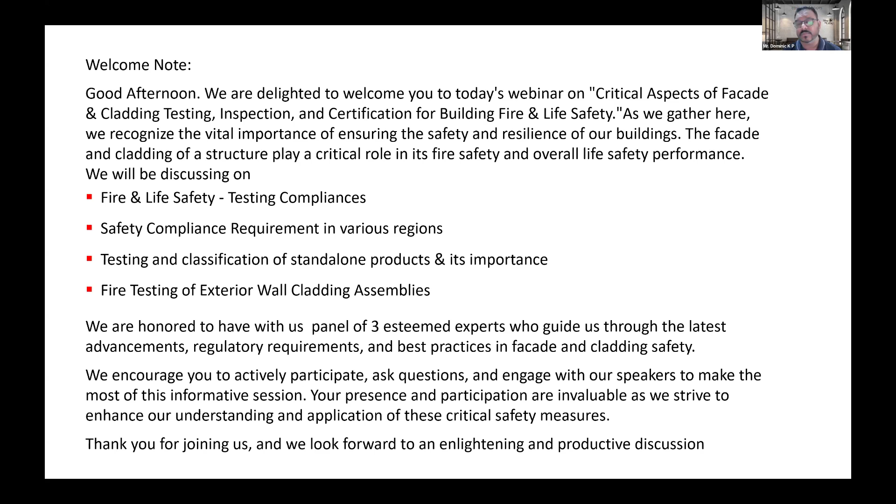I would like to introduce today's speakers. We have Julius here from Dubai, based out of Dubai, and he'll be talking to us from there. He's a senior certification specialist with over 4 years experience in conformity assessment body and 15 years experience in building engineering and construction. He worked as an electrical engineer and senior MEP engineer with different organizations, delivering wide varieties of small and large-scale building projects, involved in building MEP system design, implementation, and supervision. Before joining Emirates Safety Lab as a specialist in conformity certification of fire and life safety, he worked in Dubai Civil Defense as a DCD approved engineer or inspector in a third-party fire consultant house of expertise, where he enhanced his knowledge and expertise in building, fire, and life safety.

This is Julius for you gentlemen, and we have another speaker, Rachel. Rachel also worked in the testing, inspection, certification industry for over 8 years, and she has technical expertise and in-depth knowledge in various reaction to fire standards, including Steiner tunnel test methods, European standard EN 13501 for classification of construction products, roof, fabric, upholstery testing, and cone calorimeter. That's Rachel for you.

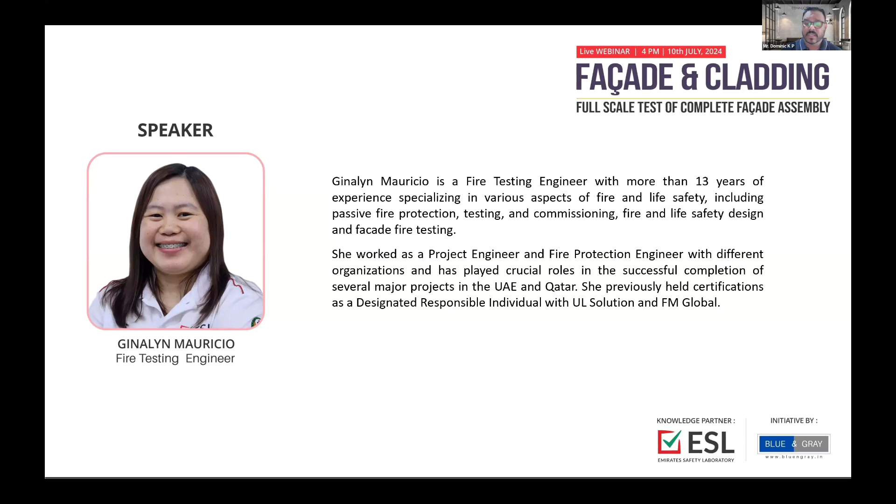And the third speaker, we have Gina. Gina is a fire testing engineer with more than 13 years of experience, specialized in various aspects of fire and life safety, including passive fire protection, testing, commissioning, and fire and life safety design and facade fire testing. She's been with Emirates Safety Lab for some years, and these three wonderful experts will be sharing with us today. I now welcome Mrinal, who's a regional manager also responsible in India, to give opening remarks, and later Julius will take on the presentation. Over to you, Mrinal. Thank you, Dominic.

Welcome everybody, it's my pleasure to welcome all of you for joining this insightful webinar on external facades and cladding. As the construction industry is evolving with the latest standards, innovations, and best practices in building facade systems, through this webinar it's our humble attempt to share insights on the latest testing methodologies and certifications crucial for ensuring the durability and safety of using such systems on construction projects.

I will just brief about what ESL is and who we are. ESL is an internationally accredited third-party testing laboratory and certification body based out of Dubai. We specialize in the fire safety of construction products and building materials. ESL is part of Dubai Civil Defense, and we are capable to test for more than 110 standards and to certify for more than 600 standards.

For our guests who are based in different countries and are looking to market their products here in Middle East or in UAE, we are here for the long term to facilitate market access to local, regional, and global entities by providing conformity assessment activities and ensuring safety and compliance with the local rules and regulations.

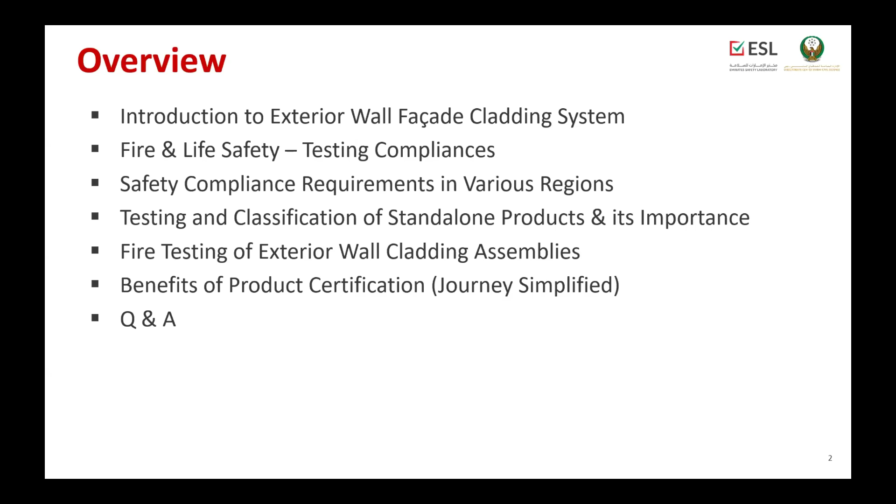So what is an exterior wall facade cladding system? When we talk about facade cladding, it refers to the external appearance of a building. In other words, it is the superficial or outermost part which envelopes the superstructure of the building. Most building exterior designs differ from each other. The aesthetic aspect is one of the main reasons why facade cladding is introduced in a building. The cladding system is a non-load bearing element, part of a building exterior, meaning it has no structural function and is not structurally integral to the building.

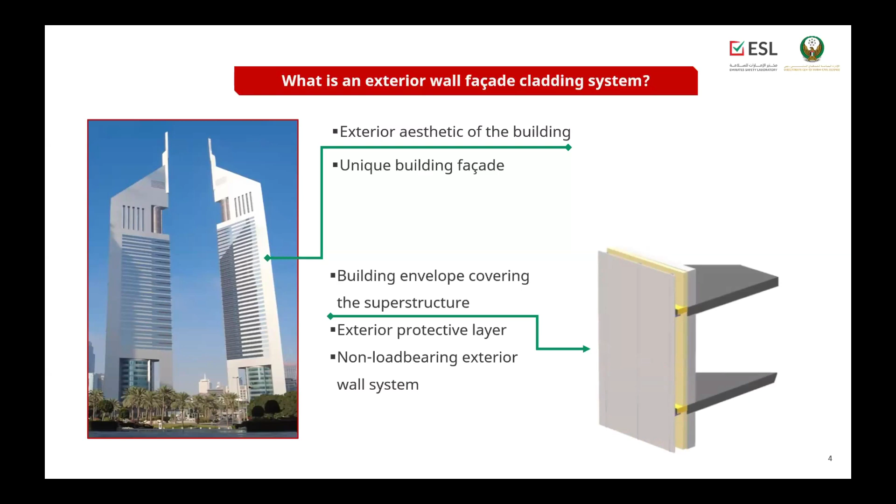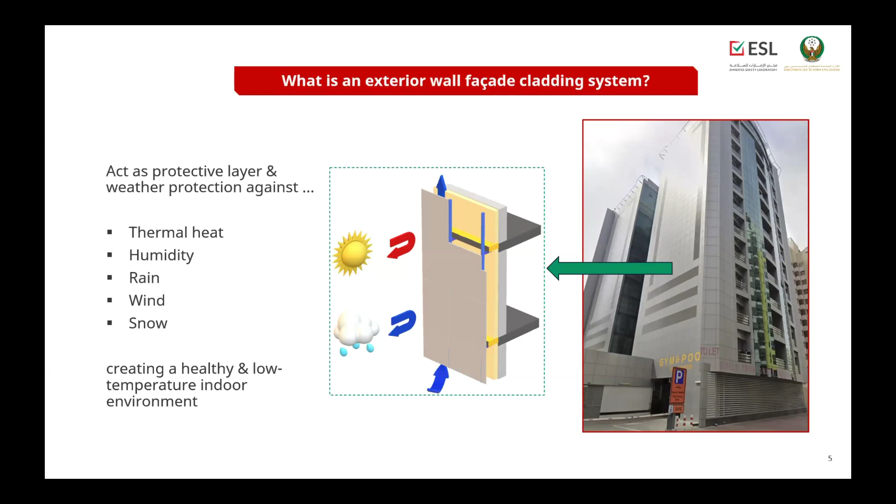They are normally supported to the main structure using framing systems mounted on the floor edges and the exterior wall substrate. Besides its main aesthetic purposes, which comes in different colors, types, and styles, the facade cladding system is designed to serve as an external protective layer. It provides weather protection against the effects of thermal heat transfer by improving the thermal transmittance or U value of the building exterior. It also protects the building from the effects of rain, wind, and snow, which contribute to exterior wall degradation if not properly protected.

Facade cladding can be categorized into two types: ventilated cladding, commonly known as rain screen cladding, and non-ventilated cladding. Ventilated cladding advantages are that air can move freely inside the cavity, preventing condensation and accumulation of moisture and allowing water to be drained. However, open joints between the cladding panels present a risk of rapid vertical fire spread, especially when combustible materials are present in the cavity. It is also considered the worst case scenario from a fire test point of view.

An open state cavity fire barrier must be installed to mitigate rapid fire propagation in the cavity of a ventilated facade cladding. For non-ventilated cladding like EIFS, there is no air cavity or gap created between the insulation and the cladding or finishing system. Moisture may accumulate over time, leading to loosening, cracks, mold growth, and frequent moisture repairs.

Other non-ventilated cladding may have a void or cavity between the insulation and the cladding materials. These voids are divided into separate compartments by a closed-state cavity fire barrier system. The joints between cladding panels are closed and sealed using sealant and backing materials, and other methods like the dry seal system using an aluminum profile and snap-in silicone gasket. Therefore, it does not allow air to move in the cavity, and water from rain will not penetrate.

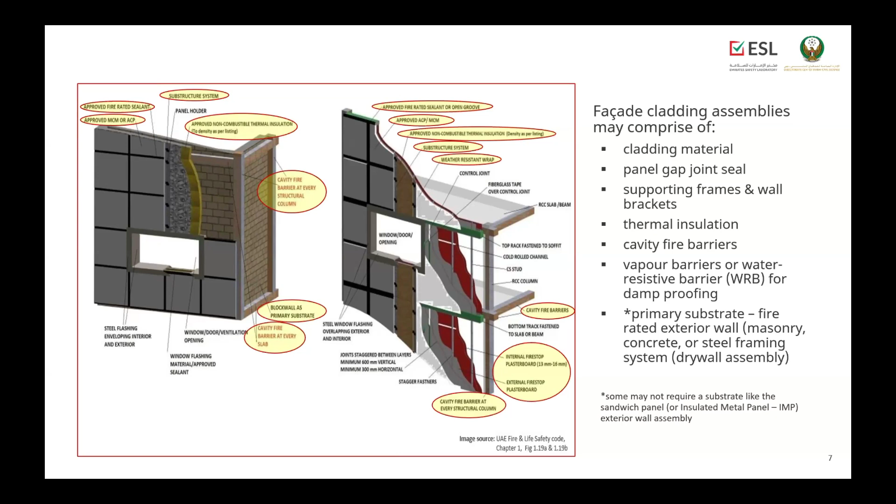Here are the various common types of cladding material used for aesthetic and external weather protection of the building. Let's start with aluminum composite panel, or aluminum composite material. It is made of two thin aluminum sheets bonded to a limited combustible or fire retardant rated core. It is commonly used due to its low weight, increased thermal insulation of the core material, durability, and corrosion resistant characteristic.

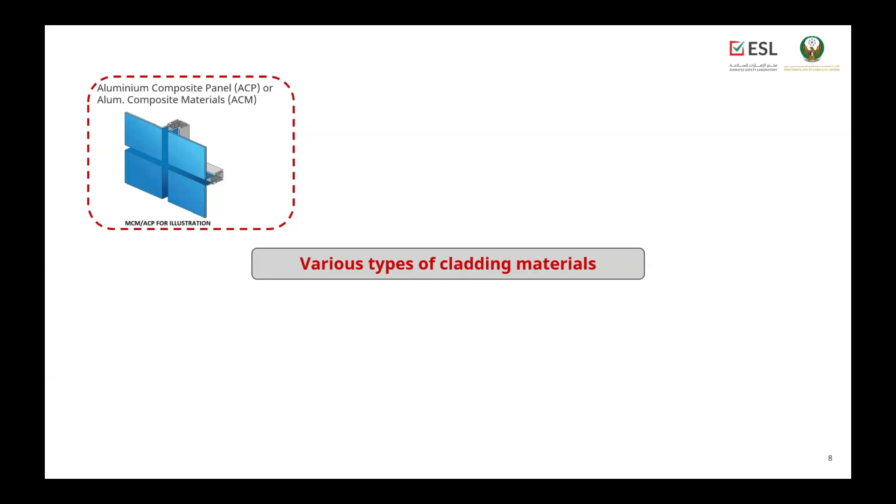Glass fiber reinforced concrete, or GRC, is a cladding material made of cement, sand, and glass fiber. Glass fiber reinforced plastic, or fiber reinforced plastic, or FRP, is a type of cladding material made of a combination of glass fiber and polymer resins.

EIFS, or exterior insulation and finishing system, or ETICS, is comprised of an on-site installed insulation board applied with a base coat, reinforcing mesh, and finishing coating material. Material like terracotta and ceramic porcelain can also be used as cladding material, made by firing clay at high temperature.

Then we have sandwich panel or insulated metal panels, made of two metal skins bonded to a PIR or stone wool core insulation material. Next is coated solid metals, made with corrosion resistant, low weight aluminum sheets or stainless sheets that are powder coated or painted with liquid coatings.

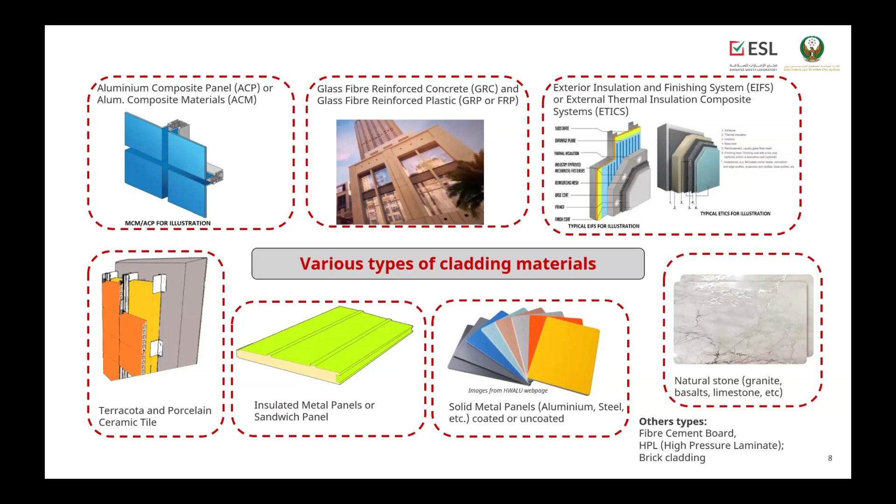Then also natural stones like granite or limestone, produced directly from the quarry, are also used as cladding materials. Other types like fiber cement boards, high pressure laminate or HPL, and conventional brick cladding can also be used as cladding material.

So why is fire safety in cladding very important in buildings, especially high-rise buildings? When combustible cladding materials and other components are installed in the facade system, the risk of igniting a fire and fire propagation is more likely due to the amount of fire load present in a facade cladding assembly. Similarly, due to the poor fire performance of exterior wall assembly in many buildings, cases of rapid exterior fire spread are being attributed to facade cladding systems.

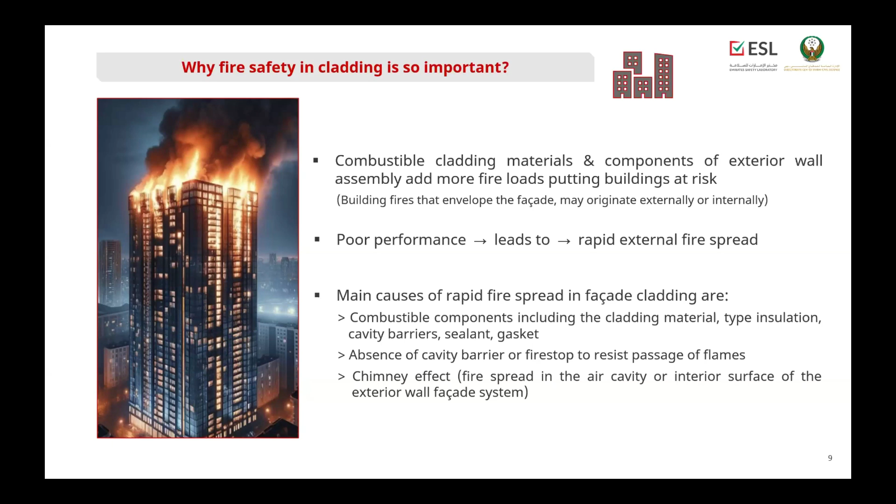The main causes of rapid fire spread in facade cladding are due to combustible components, starting from the cladding material itself, then the absence of effective cavity fire barrier that causes the chimney effect and lateral flame spread in the cavity.

To address the challenges of facade cladding fire safety, the facade cladding in existing and new buildings must be safe and durable. Ensure that tested and certified materials and systems are used. And lastly, of course, you have to set the highest fire safety requirements and ensure that everyone adheres to the regulation.

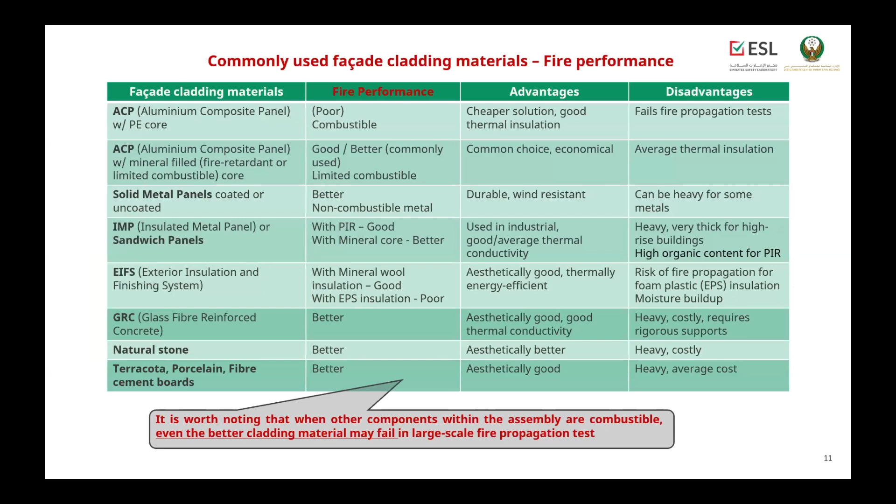So let's move on to the fire safety testing requirements, which vary in different regions or economies. Testing for facade cladding can be divided into two. First is the testing of material as a standalone product, and second is the testing of the facade system as an assembly. The purpose of testing for the product is determination of material combustibility and materials' contribution to the growth of fire.

It applies to mostly all the components of the cladding, including thermal insulation, vapor barriers, cavity barriers, and joint or sealant components. For the testing of assembly and system, the main purpose is to evaluate the fire propagation characteristic of exterior wall assemblies and also determine the fire performance characteristic of the external cladding system.

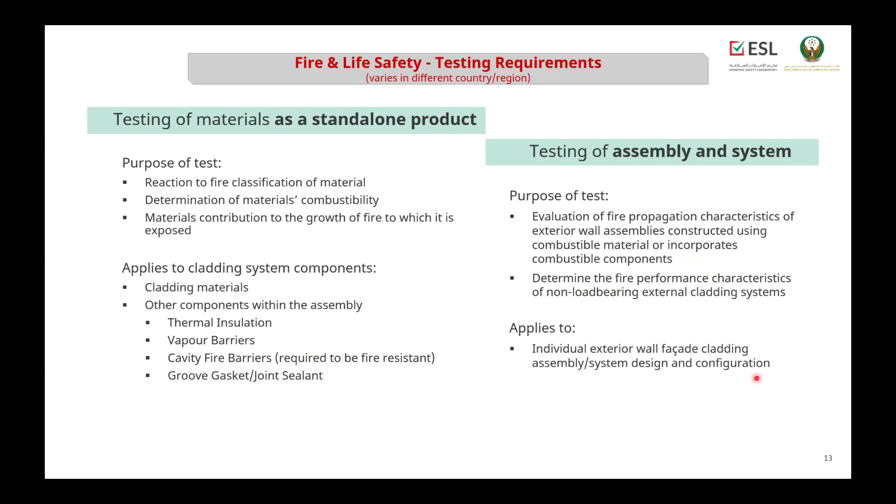So here are some of the testing methods that are practiced in different regions. On the left side we have the reaction to fire testing, or standalone product testing, that is applicable for different components of the cladding. But we have to note that these methods do not determine the fire resistance or the product's ability to resist the passage of flame and hot gases.

So we have different standards from European, from American, and also BS from the UK or British standards, as well as IS standards, Indian standards, that are applicable for testing standalone products. Also on the right side is the testing of assembly and systems that are recognized in different countries, like the NFPA 285 and BS 8414 testing.

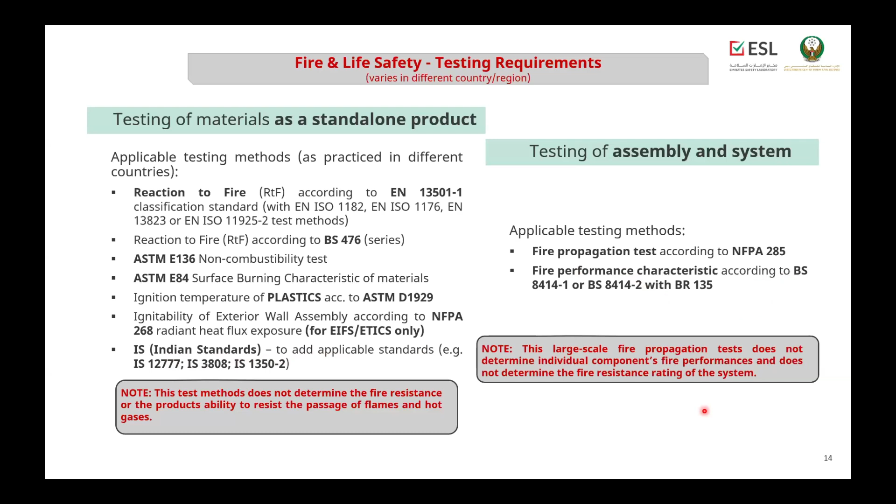And again, a note is that this large-scale fire propagation test does not determine the individual components' fire performance and does not determine the fire resistance rating of the system.

I will start by giving you detailed information about the requirements for different countries or regions, starting from the UAE. The UAE Fire and Life Safety Code of Practice, in Chapter 1 and Section 4, provides the compliance requirements for facade and exterior wall covering systems, applicable for different types of cladding like ACP, EIFS, sandwich panels, GRP, and other types of cladding detailed in separate sections.

So in general, for super high-rise buildings, high-rise buildings, malls, schools, and hospitals, the cladding materials are required to meet Class A1 or Class A2 S1D0 in accordance with EN 13501. For mid-rise and low-rise buildings, including warehouse and industrial buildings, the classification required should be classified to B-s1,d0 in accordance with EN 13501.

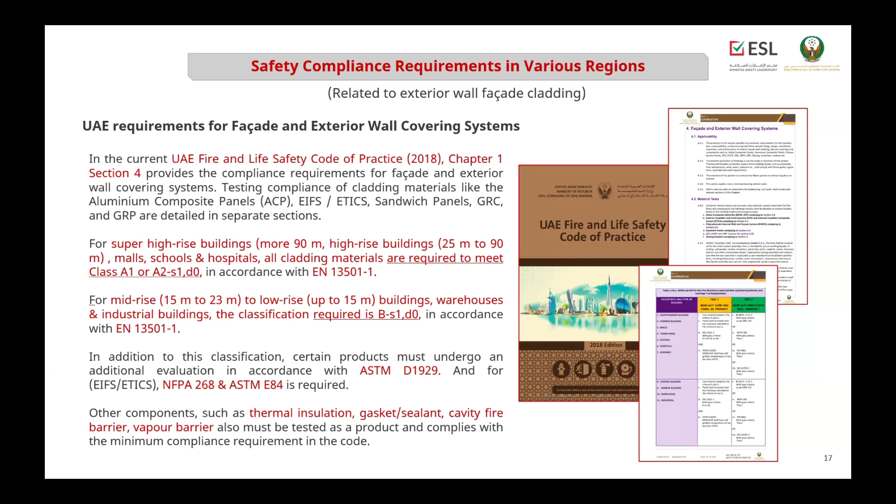So also in Chapter 1, Section 4, the requirement for testing of all the facade cladding must be done or must be tested as an assembly and obtain a pass classification in accordance with NFPA 285 or BS 8414 Part 1 or Part 2, under the classification of BR 135.

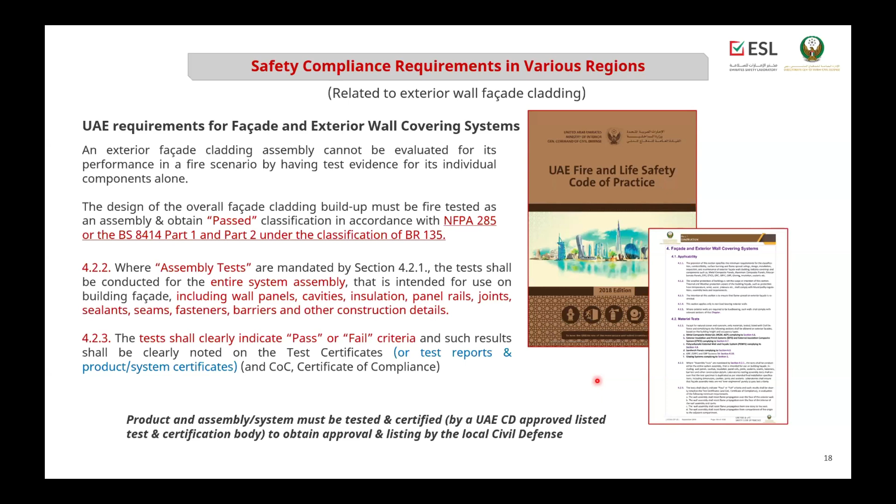So also the requirement for the UAE is that all the products and assembly systems must be tested and certified. And also there will be a requirement that there should be testing and certification by a UAE Civil Defense approved, listed testing and certification body, to obtain an approval and listing by the local civil defense.

Next is for the Kingdom of Saudi Arabia, which follows the code requirements as per SBC 201. In Chapter 14 of SBC 201, it requires that for buildings of type 1, type 2, type 3, or type 4 construction greater than 12 meters in height, it should be tested with acceptance criteria of NFPA 285. And for combustible exterior wall coverings installed in exterior walls having a fire separation of 1.5 or less, they shall not exhibit sustained flaming as defined in NFPA 285.

They also have separate requirements for specific cladding material like MCM or ACP. For type 1 to type 4 construction, the ACP shall have a flame spread of not more than 25 and smoke development of 450 or less when tested to ASTM E84 or UL 723. Also, the thermal barrier or insulation materials should pass testing to NFPA 285 and NFPA 275.

They also require a full-scale testing for the whole assembly using MCM system or MCM cladding material, based on NFPA 285 testing. However, there's also an exception for MCM installation above 12 meters, 15 meters, and 23 meters that doesn't require ASTM E84 and NFPA 285 testing, but they have to satisfy the requirements for fire separation distances and specific results from ASTM D1929 and/or ASTM D635.

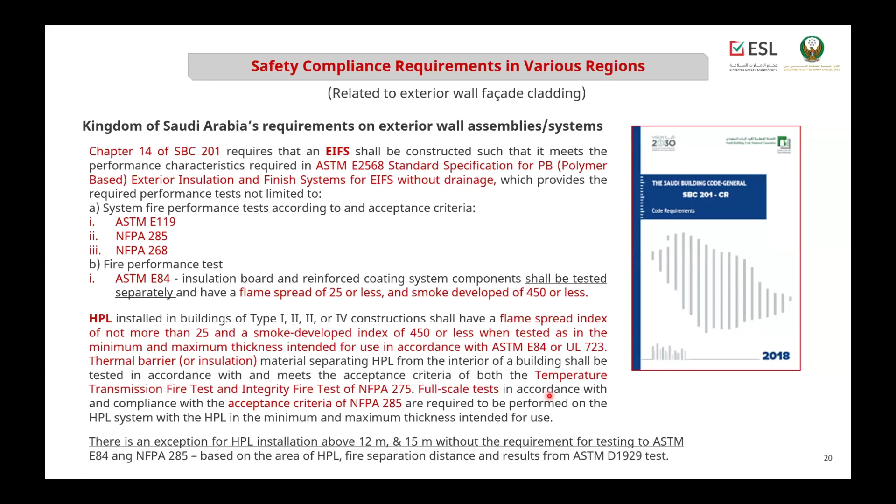So in Saudi Arabia also there is a specific requirement for aluminum composite panel for external cladding and internal finish based on SASO 2752. In SASO 2752, the ACP are actually classified in 3 different classifications: the FR1 ACP, which is equivalent to A1, then FR2 ACP equivalent to A2S1D0, and FR3 ACP, which is equivalent to Class B S1D0 based on EN 13501-1.

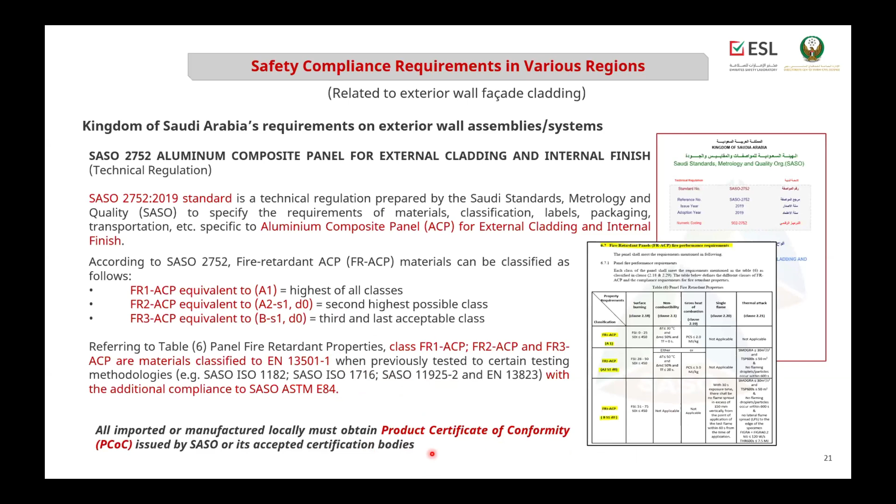So the only addition here, or as required by SASO 2752, is that ACP should be tested not only to EN 13501-1, but also tested to ASTM E84 to obtain the classification. And basically, all imported or manufactured locally products must obtain a product certificate of conformity issued by SASO or its accepted certification body.

So we go to the requirement for England regarding facade systems on high-rise buildings. So the reference is the Approved Document B, the latest version being the 2022 version, or the amendment 2022.

So they require that combustibility of external walls should meet the following provision for the external surfaces, materials and products, cavity fire barriers, and also it has to meet the fire performance criteria given in BRE for external walls using full-scale test data from the BS 8414-1 or BS 8414-2.

And also in England, since June 2022, the amendment to the Approved Document B requires that for relevant buildings, or those buildings that contain one or more dwellings, an institution, or a room for residential purposes with height more than 18 meters above ground level, and residential purposes group 1 and 2 with height more than 11 meters, that are also part of the external wall, shall have a classification of A2 S1D0 or Class A1.

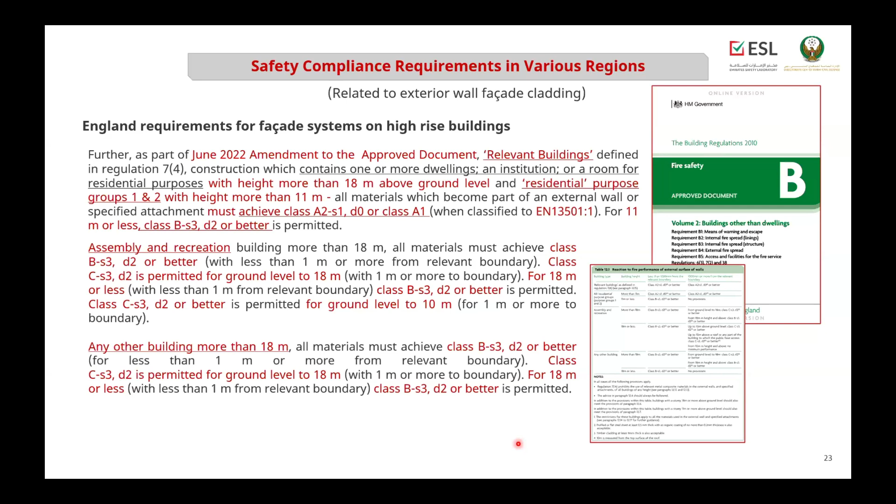There are also certain specific requirements in Approved Document B for cavity and cavity barriers, and it is written in section 9 that it requires the cavity barriers to have a minimum of at least 30 minutes integrity, or E30, and 15 minutes insulation, or I15, and the surface which faces the cavity should follow the provision of table 12.1 for all materials of external construction to be complied with.

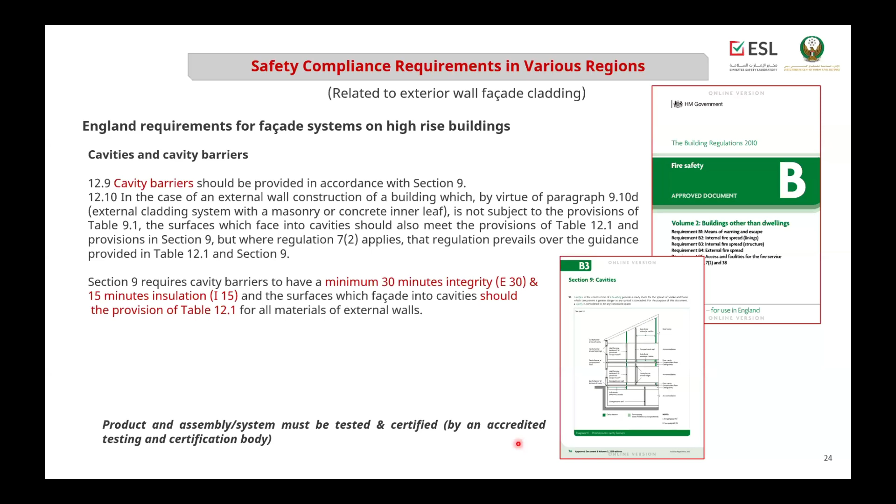So also the requirement in England and the UK normally requires that product and assembly testing must be tested and certified by an accredited testing and certification body. So moving on to the Singapore code requirements for external wall assemblies or wall finishes.

They require that for homogeneous cladding on external walls, it shall be constructed of material of at least limited combustibility tested in accordance with BS 476 Part 11 or approved equivalent. And they also allow Class 0 flame spread rating tested in accordance with BS 476 Part 7, and Class B rating classified under EN 13501-1.

So there's also a separate requirement for composite panels used as cladding on the external wall, and it requires that the composite panel used for external cladding shall be mounted against a 1 hour fire rated wall and shall comply with any of the following.

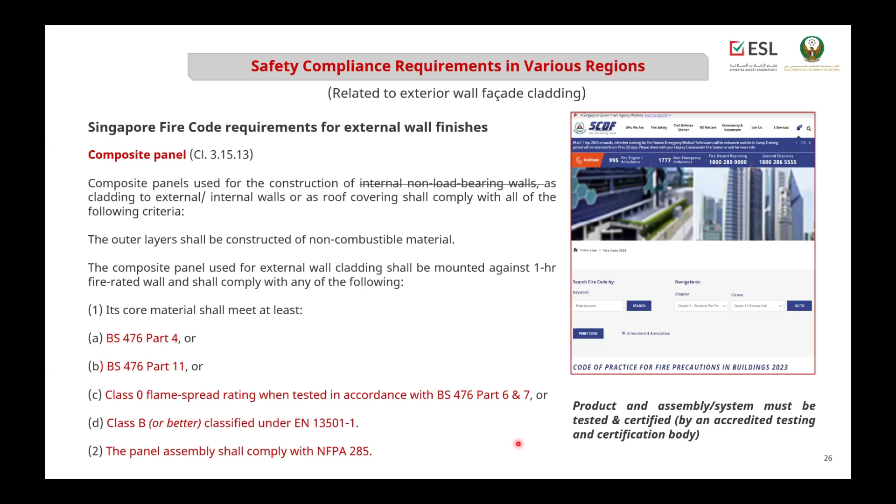So the core material of a composite panel should have obtained or passed the test for BS 476 Part 4, then BS 476 Part 11, and also obtain a Class 0 flame spread rating when tested to BS 476 Part 6 and 7, or have a Class B or better classification under EN 13501-1. Singapore also requires that the panel assembly or exterior wall facade cladding assembly shall comply with NFPA 285 testing requirements.

Next, moving on is the requirement from IBC 2021, which is basically applicable for the majority of states in the USA. The main requirement for exterior walls is written or provided in Chapter 14, Exterior Walls.

There are requirements for water-resistive barriers that are installed or provided in Type 1, Type 2, Type 3, Type 4 construction that are greater than 40 feet or 12 meters and contain a combustible water-resistive barrier - they should comply with the acceptance criteria of NFPA 285.

And for combustible material on the exterior side of the exterior wall, they require that combustible exterior wall covering shall not exceed 10% of an exterior wall surface area where the fire separation distance is 5 feet. Also, the combustible exterior wall covering shall be limited to 40 feet or 12 meters in height above grade plane. They also require that wood veneer shall comply with the specific requirement in section 1404.5.

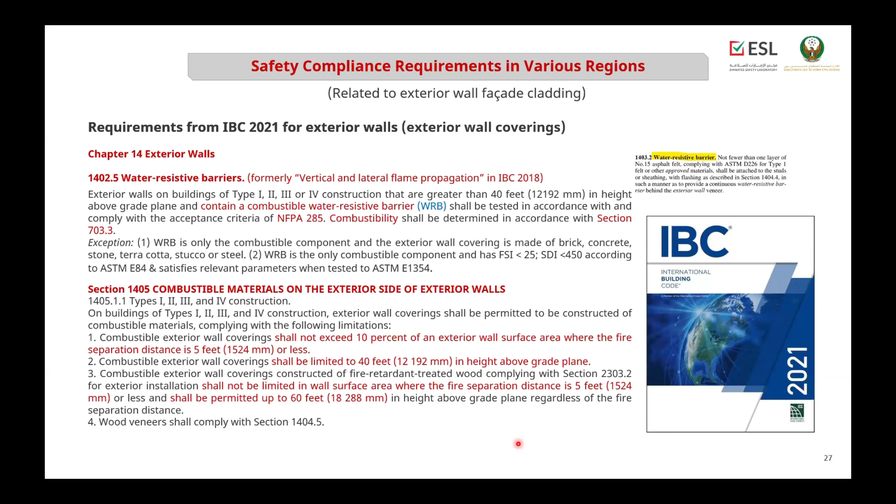So non-combustible materials in IBC are determined by testing to ASTM E136 and also ASTM E2652. There's also an exception for materials to not be tested to ASTM E136 if the materials have a structural base of non-combustible material determined with ASTM E136 - these are, for example, materials applied to a non-combustible material like fiber cement board.

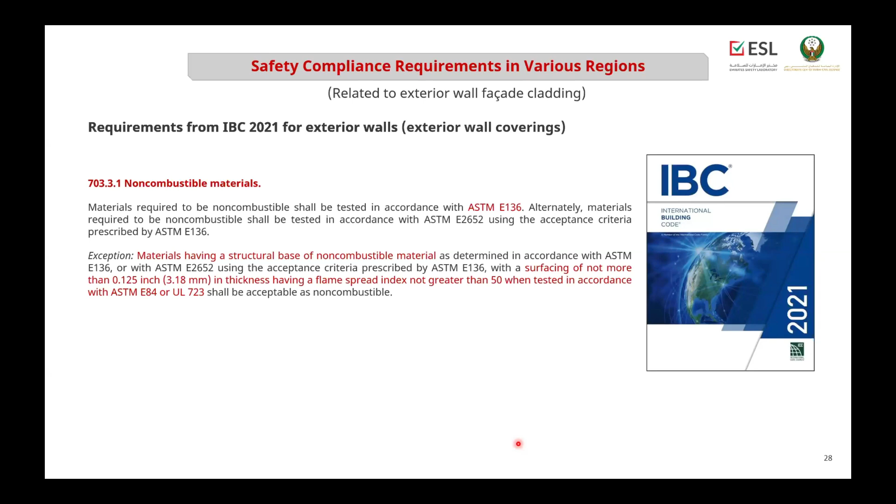It will be exempted from testing to ASTM E84, ASTM E136, and will be classified as non-combustible when the surface of not more than 0.125 inch thickness has a flame spread not greater than 50 when tested in accordance with ASTM E84.

There's a specific requirement for metal composite materials, or ACP. They require that there should be a fire resistance rating when tested, when the MCM system is used in the exterior wall, required to have a fire resistance rating in accordance with section 705. There's also an exemption to not test for fire resistance when the MCM system that is part of an exterior wall assembly or envelope does not contain foam plastic insulation.

For metal composite panels, there's a minimum requirement that they should be tested to ASTM E84 and obtain a flame spread index of not more than 25 and smoke developed index of not more than 450. And of course, they require also a separate test of the MCM system to a full-scale test based on NFPA 285 testing.

And for EIFS, the separate requirement from IBC is that the performance characteristic should follow or pass ASTM E2568, which requires the test mentioned in the table - it should be tested to ASTM E119, to NFPA 285, and also to NFPA 268. The fire performance test of EIFS per component should be tested to ASTM E84.

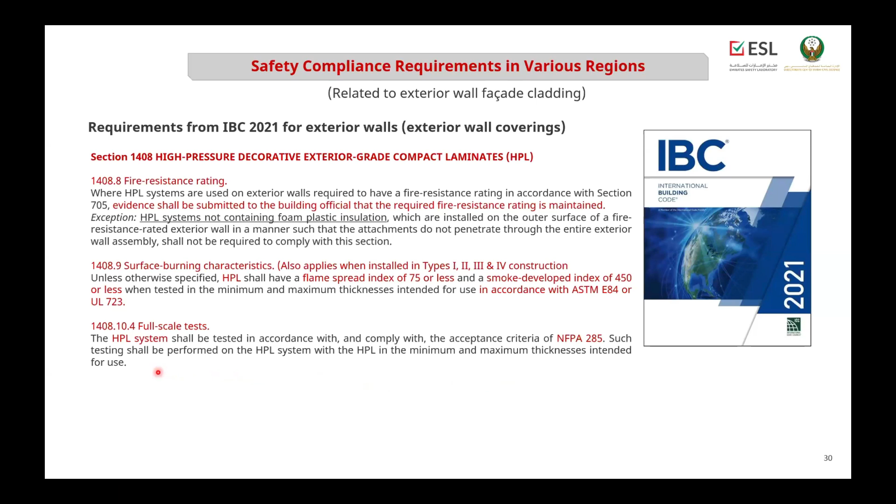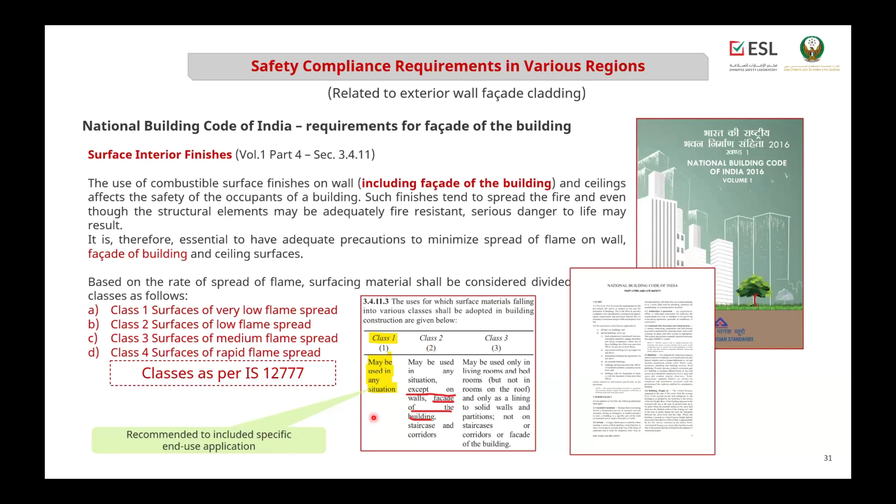I have done some checking on specific standards mentioned in this specification of ACP, where I found that some of these standards have the same concept as other international standards. For example, IS 1350-2 has the same concept as EN ISO 1716 for bomb calorimeter, and IS 3808 is identical to BS 476-4 or EN ISO 1182 for non-combustibility test, and IS 12777 is identical to BS 476-6 or 7, which is for flame spread characteristic. There's also IS 15061 Annex B which has the same concept as EN ISO 11925-2, for ignition of the product or material test.

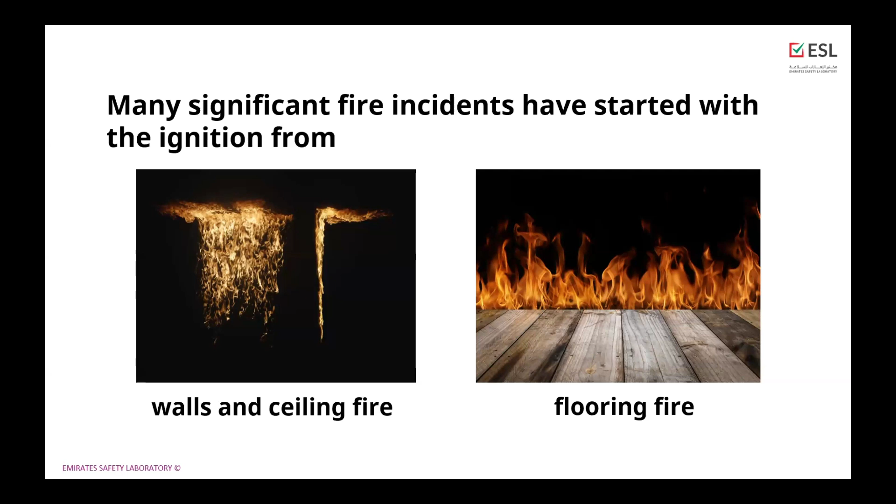For the past years, many significant fire incidents have started with the ignition of products from the walls, ceiling, and floor, as these products are often made of highly combustible synthetic materials. As a result, many lives were lost due to the limited time of evacuation and the dangers that come with flashovers. We always hear the word to prevent flashover.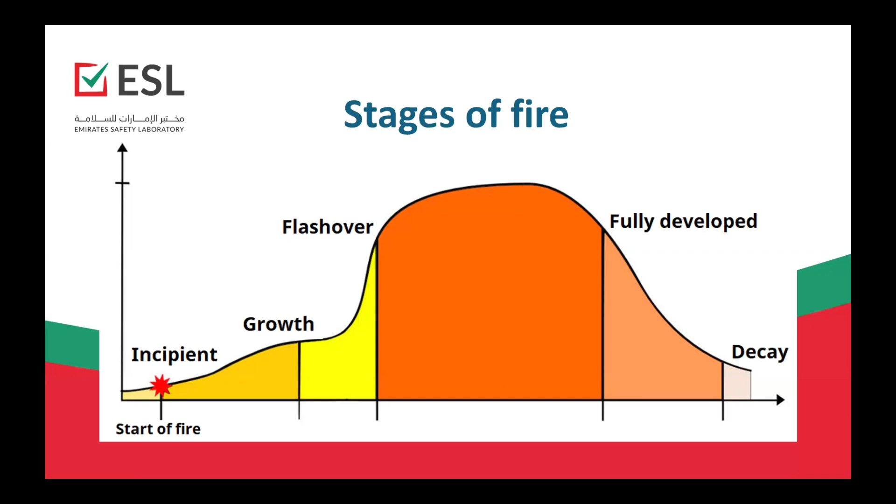What is a flashover then? Here we have the stages of fire. There are 5 stages in the development of fire. First is the incipient stage, where initial ignition happens. Ignition may come from an open flame or smoldering source. The second stage is growth, where the fire grows depending on fuel load, combustion type, and oxygen availability. Next is flashover, the transitional stage between growth and fully developed stage. Fourth is the fully developed stage, where the fire has reached its maximum potential. Last is decay, the final stage of fire, where fire begins to subside and no oxygen and fuel is introduced to the space.

Focusing on flashover, it is defined as a rapid fire progress. NFPA 921 defines it as a transitional phase in the development of a compartment fire in which surfaces exposed to thermal radiation reach their ignition temperature, and fire spreads rapidly throughout the space, resulting in full room involvement or total involvement of the compartment or enclosed area. In short terms, flashover is a transition from having a fire in that room to having that room on fire. The UAE Civil Defense, or any authority having jurisdiction of every country, regulates testing for products to verify that every combustible surface exposed to thermal radiation in a compartment or enclosed space does not rapidly and simultaneously ignite and result in a flashover.

According to studies by UL, the rate of flashover for modern homes is 8 times faster than it was 50 years ago. So UL determined that fires today are more dangerous and pose more risks than in the past. The findings about modern home fires highlight that the conditions we face today and will face in the future are very different than those faced by prior generations. So in these evolving times, what can be considered as a measurement technique to assess combustibility of materials? This is where the EN 13501 test methods come in.

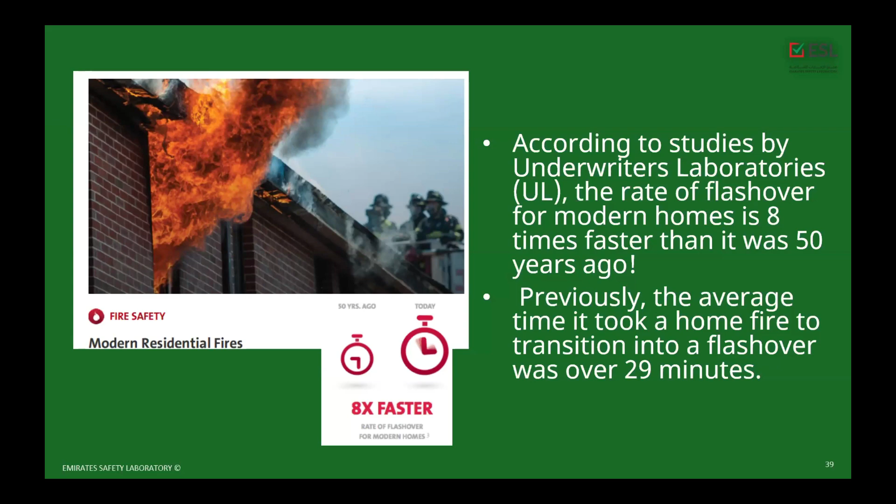The aim of this European standard is to define a harmonized procedure for the classification of reaction to fire performance. So this is not a testing standard, but it specifies which tests are to be conducted for which classification and the required results for each class.

For example, for a product to be classified A2, with no contribution to fire but potential to produce smoke or flaming droplets, we would need EN ISO 1182 or EN ISO 1716 in combination with EN 13823.

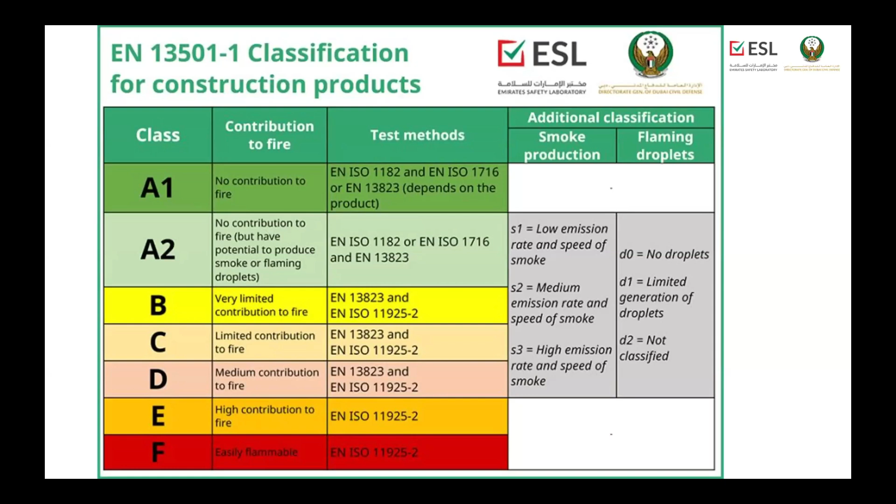Compliance with EN 13501-1 is often a legal requirement in many countries. By adhering to this standard, you not only enhance safety, but also stay within the bounds of the law. In terms of global acceptance, this standard is recognized internationally, making it easier for companies to trade their products in various markets. So let us start with the first standard.

The test is EN ISO 1716, also known as the bomb calorimeter test. It's a fire test that determines the heat of combustion by burning a specimen of specified mass under standardized conditions at a constant volume in an atmosphere of oxygen, in a bomb calorimeter calibrated by combustion of certified benzoic acid. To summarize this quite complicated description, let us watch this short clip about the test.

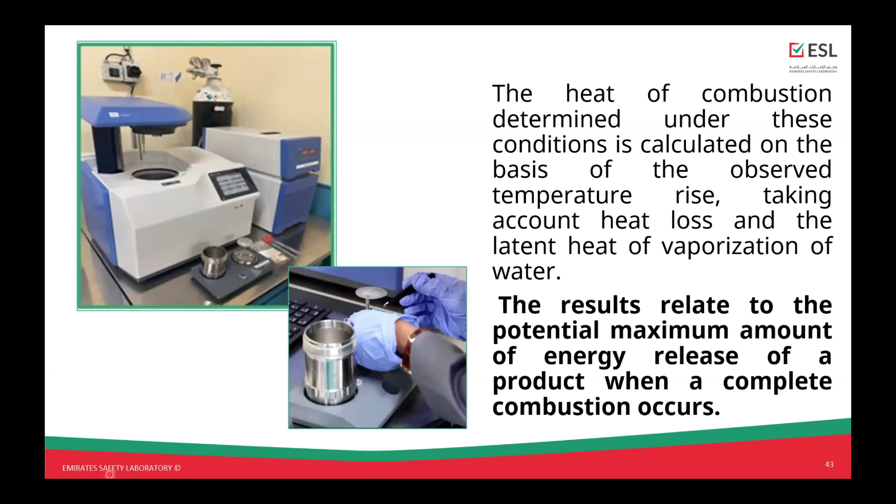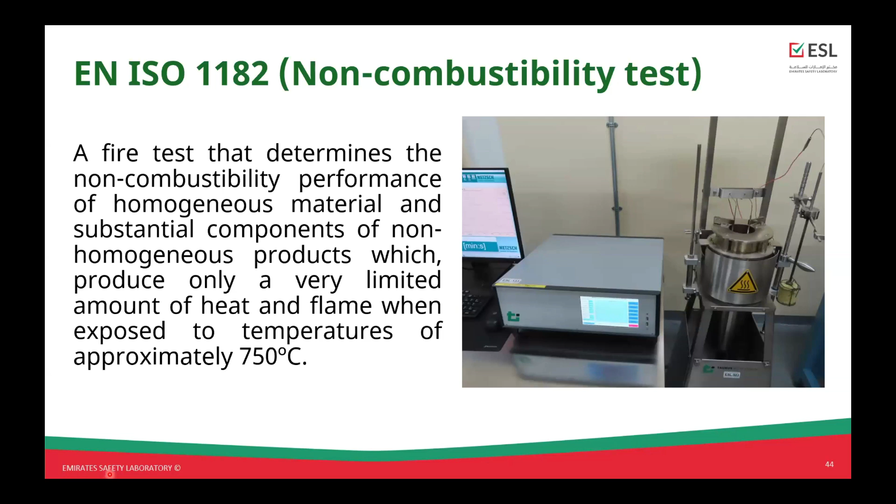The next test method is EN ISO 1182, the non-combustibility test. It determines the non-combustibility performance of homogeneous materials and substantial components of non-homogeneous products, which produce only a very limited amount of heat and flame when exposed to temperatures of approximately 750 degrees Celsius. We stabilize the furnace at 750 degrees Celsius before we start the test.

A complete test shall be conducted on 5 cylindrical specimens with a diameter of 45 mm and a height of 50 mm. The results relate to the specimen mass loss, occurrence and duration of sustained flaming, and temperature rise in the furnace.

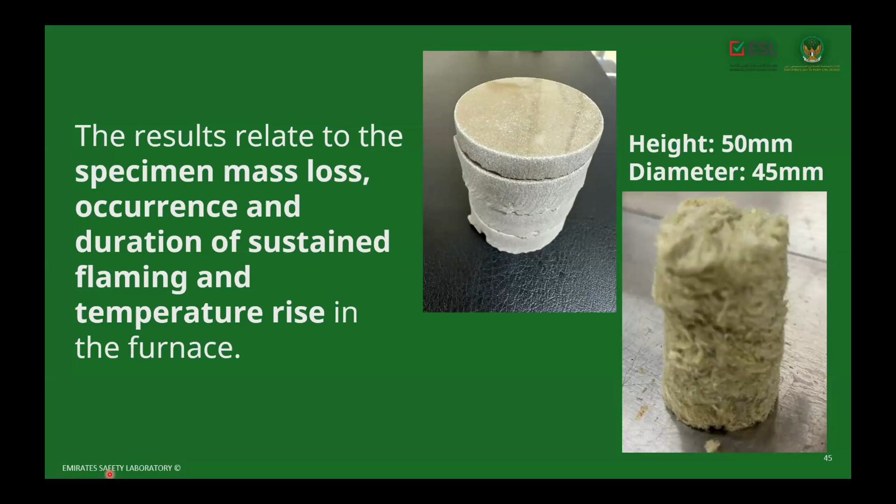The next test method is EN 13823, the single burning item test. It is an intermediate scale test method used to measure heat and smoke release rate, lateral flame spread, and flaming droplets. Heat release rate relates to the amount of energy generated during combustion and is based on the oxygen consumption principle, which shows that the heat release from a burning specimen is directly related to the oxygen consumed during that combustion.

For the SBI test, a specimen consisting of two vertical wings forming a right-angled corner is exposed to flames from a burner placed at the bottom of the corner, known as the main or primary burner. The flames are obtained by combustion of propane gas diffused through a sandbox, giving a heat output of 30 kilowatts. The performance of the test specimen is evaluated over a period of 20 minutes.

The results from the EN 13823 test relate to the potential contribution of a material or product, under intended end-use conditions, towards the development of fire. So we have another short clip showing ESL's SBI test rig.

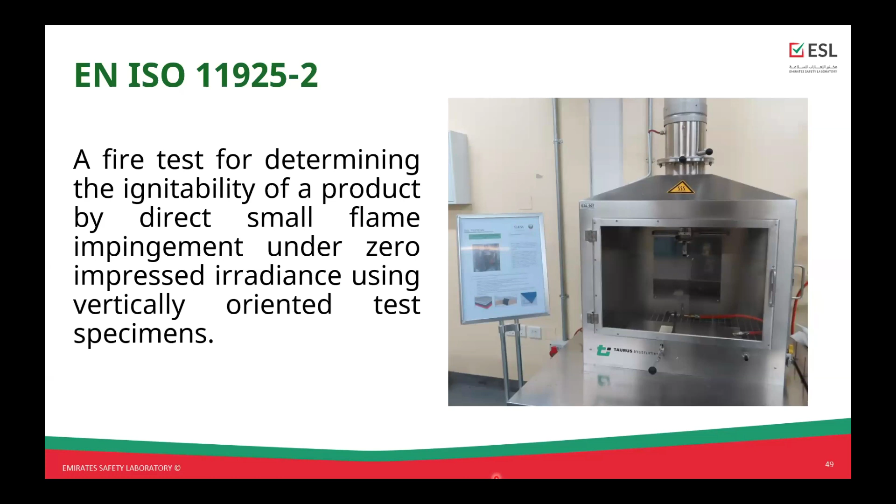The next test method is EN ISO 11925-2. It is a fire test for determining the ignitability of a product by direct small flame impingement under zero impressed irradiance, using vertically oriented test specimens. The test shall be conducted on specimens with dimensions of 250 mm by 90 mm and thickness not greater than 60 mm.

The samples can either be subjected to surface exposure, edge exposure, or both. The results relate to the time the flame front exceeds 150 mm from the application point, and the ignition of the filter paper below the specimen due to flaming debris.

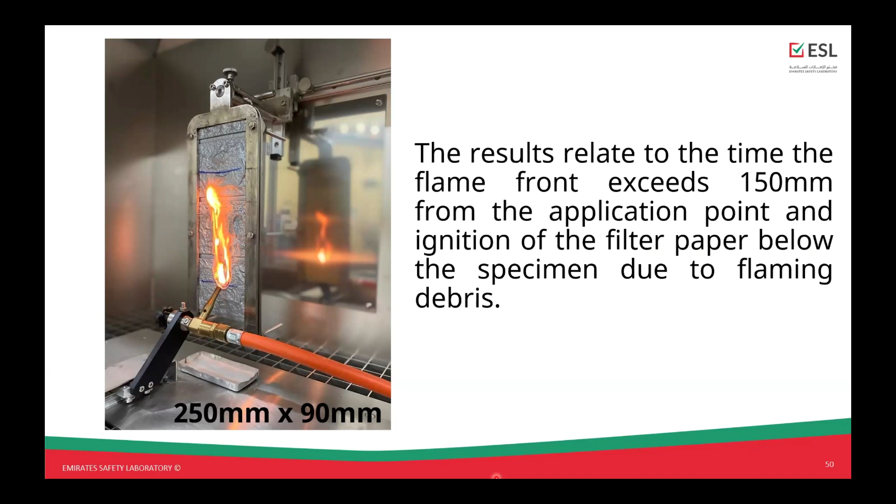Next is EN ISO 9239-1. For flooring materials, the SBI test won't apply; instead, we use EN ISO 9239-1. This is a fire test method for assessing the wind-opposed burning behavior and spread of flame of horizontally mounted floorings, exposed to a heat flux radiant gradient in a test chamber when ignited with pilot flames.

The results relate to the progression of the flame front horizontally along the length of the specimen, and the smoke development during the test, recorded as the light transmission in the exhaust stack.

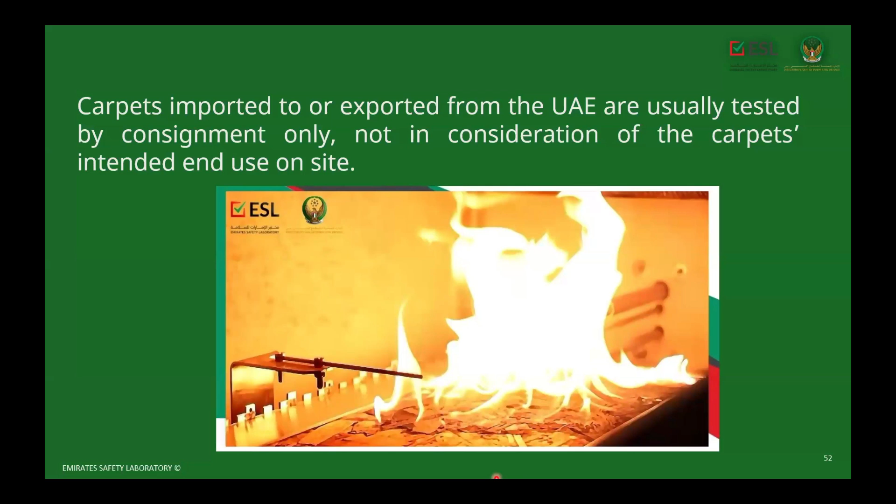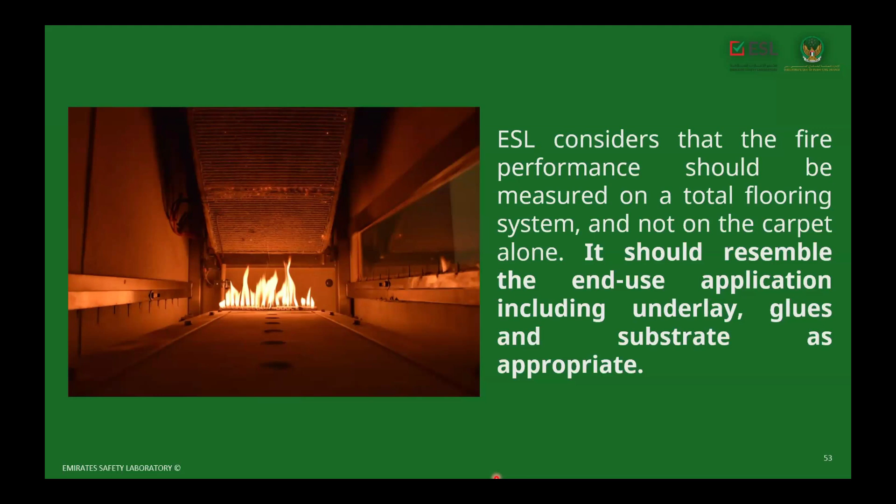One of the issues UAE is facing today is the import and export of untested products, say carpets. Carpets are usually tested by consignment only, not in consideration of the carpet's intended use on site. So ESL, following EN ISO 9239-1 standard, considers that the fire performance should be measured on the total flooring system and not on the carpet alone. It should resemble the end-use application, so it includes underlay, glues, and substrate as appropriate.

The last test method is the ASTM D1929. It is a test method that evaluates the flash ignition temperature and spontaneous ignition temperature of plastics in a hot air furnace. This assessment is crucial for comparing the ignition susceptibility of various materials and offers valuable insights into their fire behavior. This test helps identify the lowest ambient air temperature at which a material ignites, providing a benchmark for material selection and application in safety critical environments.

In line with the UAE Fire and Life Safety Code of Practice 2018, materials used in exterior facades must meet specific criteria, including a self-ignition temperature of not less than 343 degrees Celsius per D1929 standards.

So what do we believe in at ESL? We believe that modern test equipment using heat release methods as a scientific approach heavily influences the assessment of a material's behavior during a real fire scenario. With our group of experts, we can help you assess the best method to ensure a safer and sustainable future.

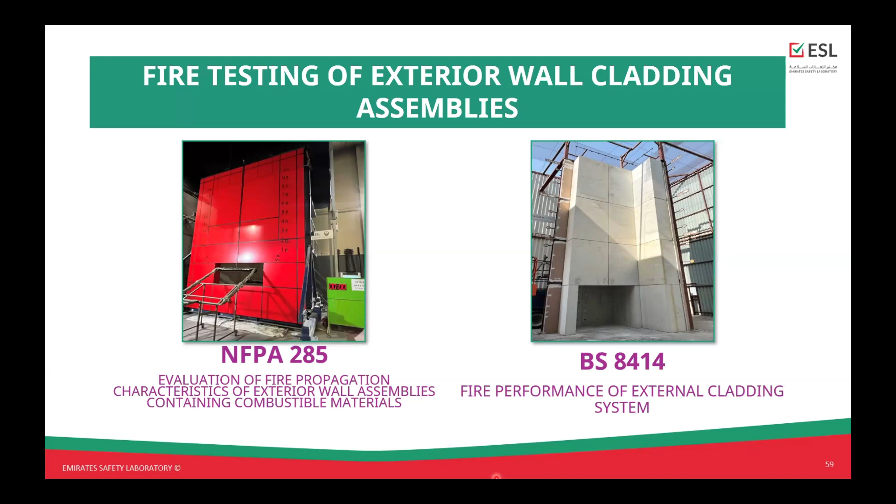Helping to identify vulnerabilities and areas for improvement. NFPA 285: this standard provides a test method for determining the fire propagation characteristics of exterior wall assemblies that are constructed using combustible materials or incorporate combustible components. The fire propagation characteristics are determined for post-flashover fires of interior origin.

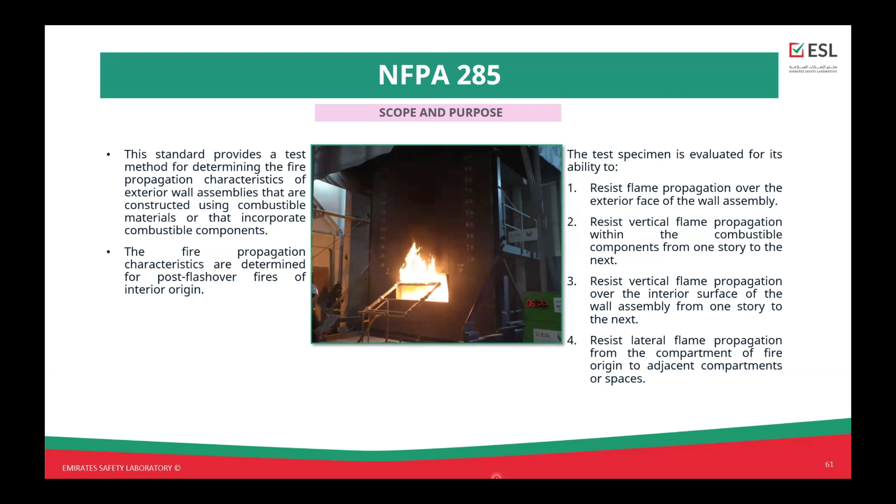Test facilities and apparatus: the test apparatus shall be located inside the test facilities. The test facility shall protect the test apparatus and specimen from exposure to wind and precipitation. These movable test frames shall be designed such as L angles. So these are the L angles, meeting at the top of the respective floor lines on the test apparatus.

Flame source: there are two flame sources used in this standard, one is the room burner and the other is the window burner. Room burner - in this figure, you can see that the burner is placed inside the first story test room. And another one is the window burner, placed near the bottom of the first story window opening.

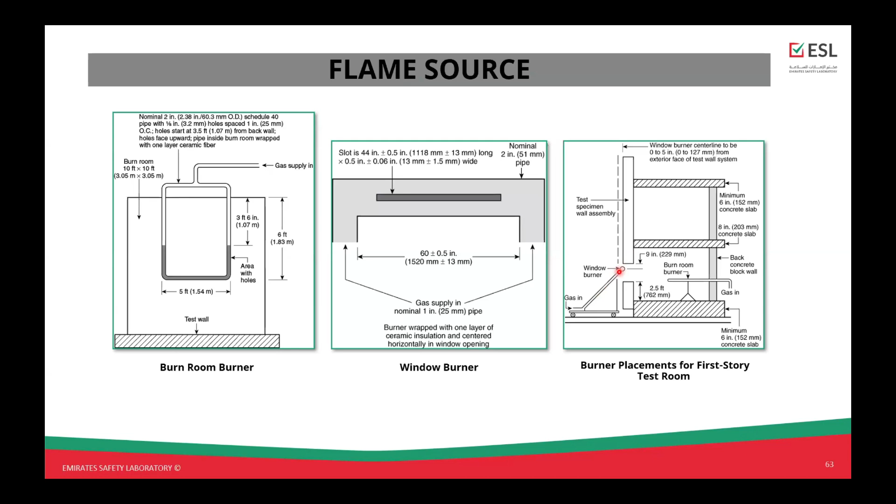Test specimen requirements: the test specimen shall be constructed on the front face of the test apparatus or movable test frame. The size of the test specimen shall be not less than 5.3 meters high by 4.1 meters wide. The edges of the test specimen shall be positioned on the test apparatus as per the required distances. Window opening: this shall be 760 millimeters high by 1,980 millimeters wide with a tolerance of plus or minus 13 millimeters, and having the sill height of 760 millimeters

above the top of the first story test room slab. Prior to the test, the specimen shall be cured as required by the manufacturer. If cementitious material or coating, the minimum curing time is 28 days.

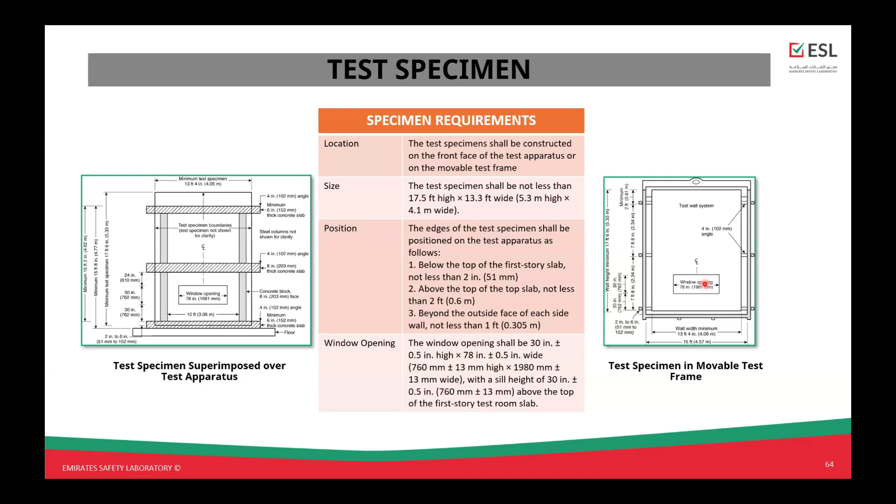Test specimen construction detail. The test specimen shall have at least one horizontal joint or seam located between 1 foot and 3 feet above the top of the window opening, and at least one vertical joint or seam extending the full height from the top of the window opening, located within 152 millimeters plus or minus of the window opening center line.

If these joint locations are used on a tested wall assembly, then any joint location is qualified for the actual wall assembly. There are also exemptions on the joint requirements: first, where the exterior veneer is EIFS; second, where the exterior veneer is 19 millimeter thick or greater standard stucco veneer; and last, where the actual design of the wall assembly to be used in the field will not have any horizontal or vertical joints.

Window opening. The window header, jamb, and sill shall be closed using aluminum sheet metal. An exemption to the window opening requirements is that the window opening construction used in the test should accurately reflect the construction details provided by the client to be installed according to the manufacturer instructions.

It is important to note that the window header design mentioned was used in a successful NFPA 285 test. Other variations of window perimeters can be used, including steel or wood of various thicknesses. But if a successful NFPA 285 test was conducted without including any window perimeter treatments, then any type of window perimeter can be used.

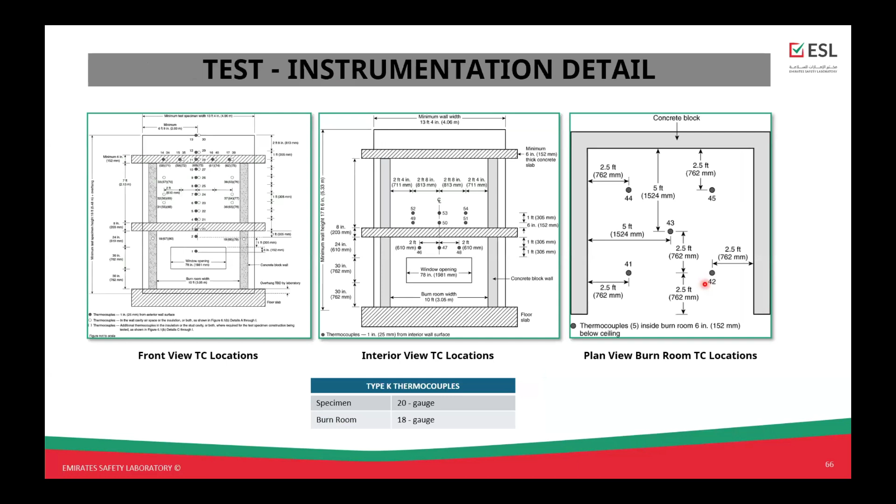Here you can see the thermocouple locations for the front view, interior view, and plan view of the burn room.

Thermocouple details. Here are the thermocouple details that you can refer to, helping you decide on the thermocouple positions and quantity to use for each test sample.

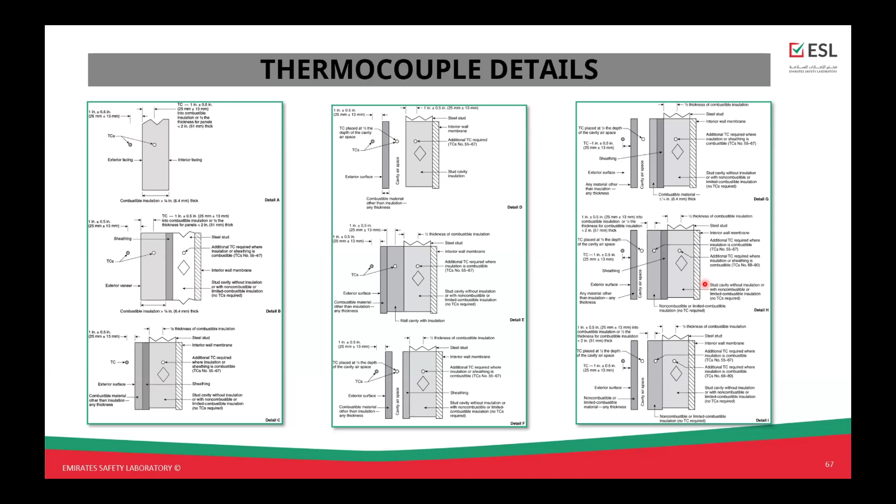Calibration requirements. The purpose of this calibration is to establish the gas flow rates required to achieve the temperature and heat flux values prescribed in Table 7.1.11. This standard allows a tolerance of -10% to an additional 20% degree in Fahrenheit values on the temperature criteria.

Calibration instrumentation details. In calibration, the location of the thermocouple will be as per these three given figures.

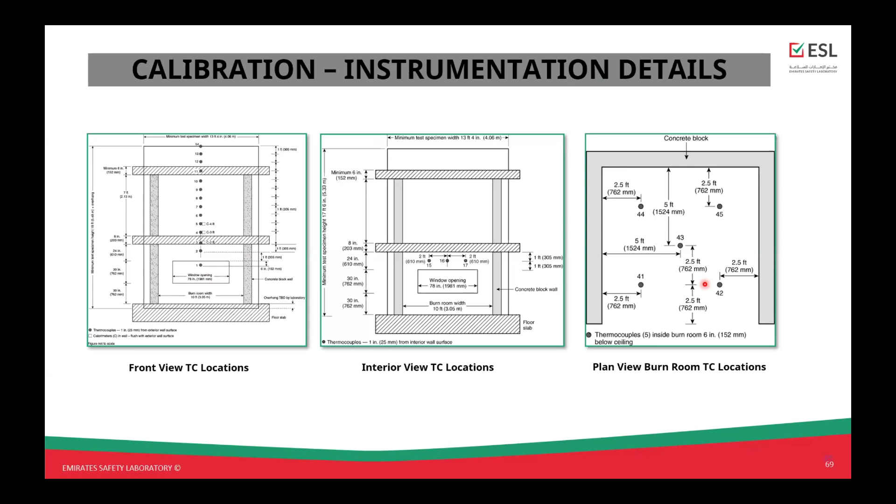Calibration process. The frequency of calibration shall be performed when any of the following occur: prior to the first wall test, or when significant changes to the gas flow systems are made, for example flow meters are new, or within 1 year prior to the test of an actual product wall assembly.

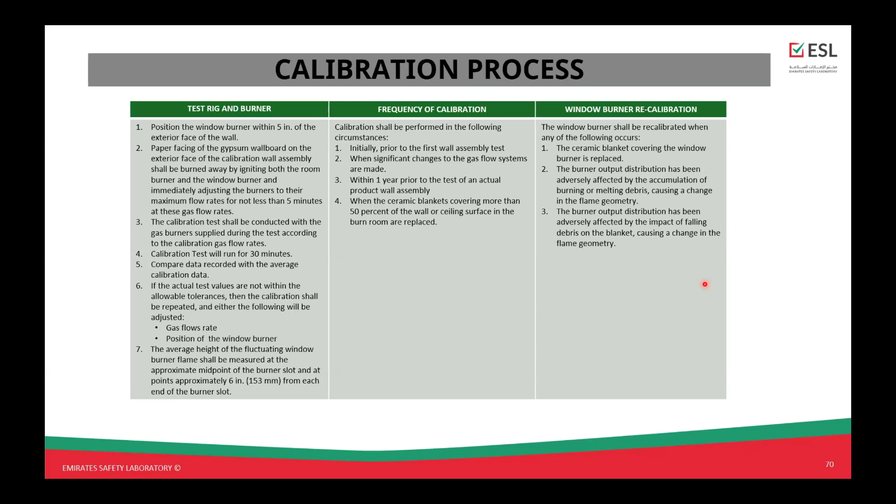Also, calibration is required when the ceramic blankets covering more than 50% of the wall or ceiling surface in the burn room are replaced. Window burners shall be recalibrated when the ceramic covering the window burner is replaced, or the burner output distribution has been adversely affected by the accumulation of burning or melting debris causing a change in flame geometry, or by the impact of falling debris on the blanket causing a change in flame geometry.

Performance criteria. The test specimen shall be considered as passing the fire test when the performance criteria specified are met during the 30-minute fire exposure.

First, the flames emitting from the surface of the exterior face of the test specimen shall not reach a height of 10 feet or greater above the top of the window opening. Flames emitting from the surface shall not reach a horizontal distance of 5 feet or greater from the vertical center line of the window opening. Flame shall not occur in the second-story test room, nor beyond the intersection of the test specimen and the side walls of the test apparatus. And last, the temperature measured by the thermocouple shall not exceed the maximum temperature set by the standards.

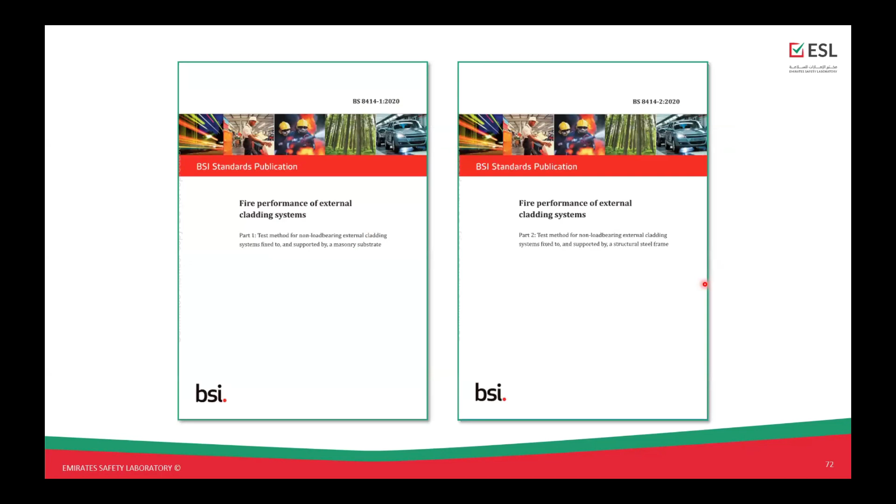Moving on to BS 8414. This standard outlines a test method for assessing the fire performance attributes of non-load-bearing external cladding systems affixed to and supported by a masonry substrate or structural steel frame. It aims to replicate a fire exposure scenario typically associated with an external fire source or a fully developed fire within a room venting through an opening that exposes the cladding to external flames. The purpose of this test method is to generate benchmark data facilitating classification of non-load-bearing external cladding systems.

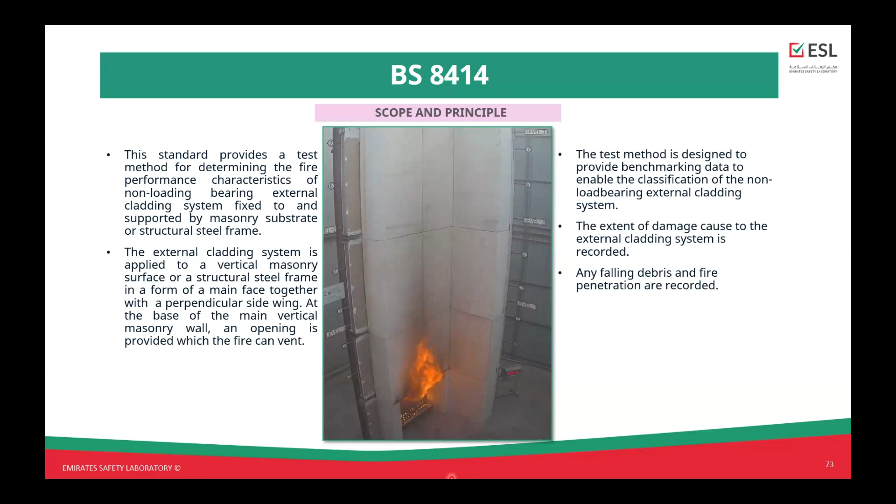Test apparatus. The test apparatus shall consist of a masonry wall or vertical structural steel frame, comprising a vertical main test wall and vertical return wall. The main test wall shall be provided with a combustion chamber.

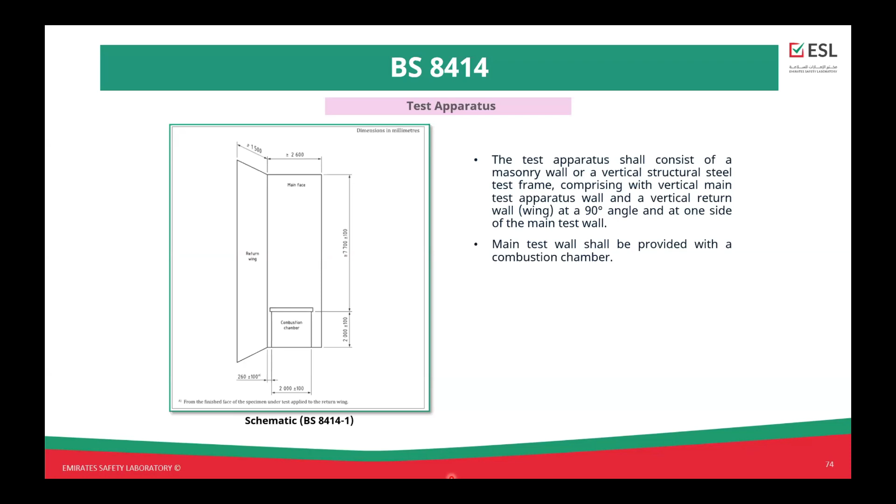Test apparatus requirement. The table outlines the apparatus requirements for BS 8414 Part 1 and 2. The primary distinction is that Part 1 utilizes blocks, while Part 2 utilizes structural steel frame. The main test wall shall have a vertical height extending to 7,700 plus or minus 100 millimeters above the top of the combustion chamber opening, and at least 2,600 millimeters wide. The return wall shall be perpendicular to the main wall, with a vertical height equal to the main wall and a minimum width of 1,500 millimeters. The combustion chamber opening shall have a robust lintel across the head of the chamber opening.

We will also use a timber heat source. This is softwood sticks, or Pinus sylvestris. The timber crib was constructed nominally 1,500 by 1,000 millimeters in plan and 1,000 millimeters in height.

Also, 6 strips of low-density fiberboard will be used to soak to 5 liters of white spirit, not more than 5 minutes before the ignition. After the ignition of the crib, it will be extinguished after 30 minutes.

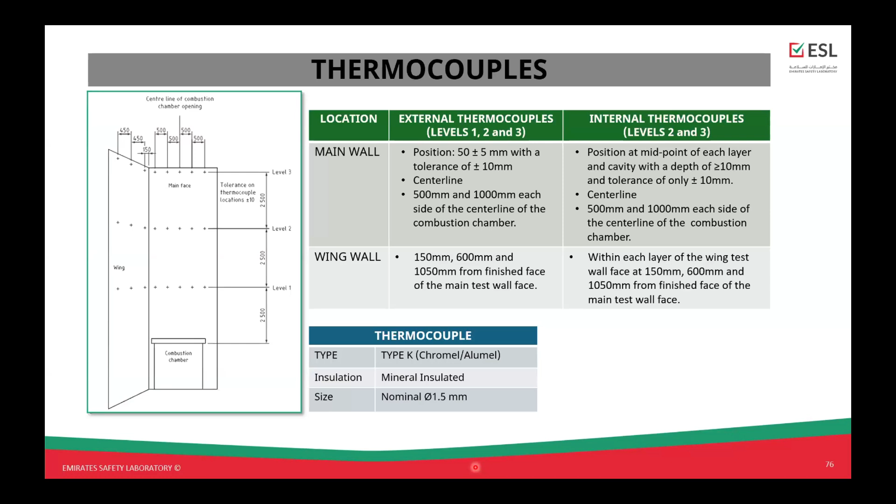Standard requirements. Early test termination line shall be drawn horizontally across the main face and the wing at level 3.

The following are the equipment required in the standard. Data acquisition system shall be capable of recording data every 10 second interval and connected to the instruments. Audiovisual equipment shall capture the entire height of both external faces and the full duration of the test.

It will record the full details of the fire spread and mechanical performance in such detail that full evaluation of the system performance is possible.

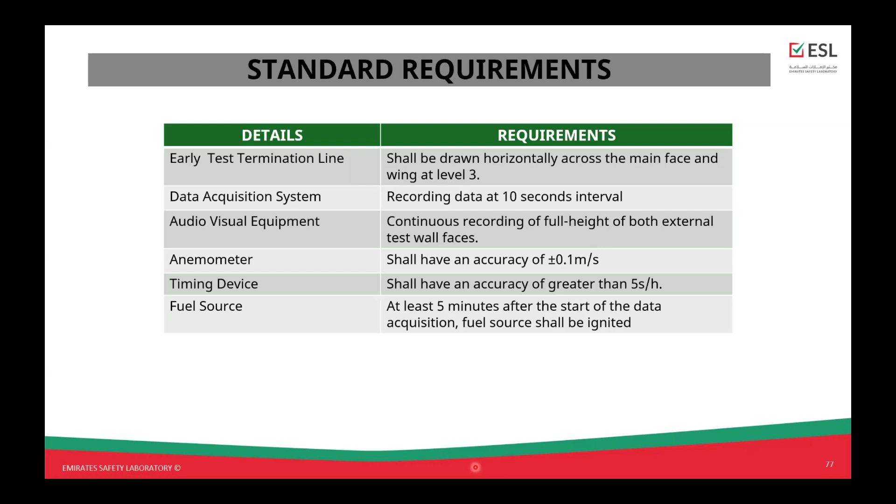Anemometer: the air velocity in any direction at level 2, when measured 1 meter away from the center line of the combustion chamber opening, shall not exceed 2 meters per second. A timing device is also required. Timber crib shall be ignited at least 5 minutes after the data acquisition starts.

Specimen requirement. The test specimen main wall shall have a width of at least 2,400 millimeters and a height of 7,700 millimeters above the combustion chamber, with a tolerance of plus or minus 100 millimeter. While the wing wall shall have at least 1,200 millimeter width and height equal to the main wall.

Horizontal joints, if incorporated into the external wall cladding system, one joint shall be placed 2,400 millimeters above the combustion chamber. While vertical joints, if incorporated into the external wall cladding system, at least one joint shall be placed plus or minus 100 millimeter on the center line of the combustion chamber. For horizontal and vertical cavity barriers, these shall be located as per end-use design.

Moving on to performance criteria and classification method for BS 8414 Part 1 and 2, as outlined in BR 135 Annex A and Annex B.

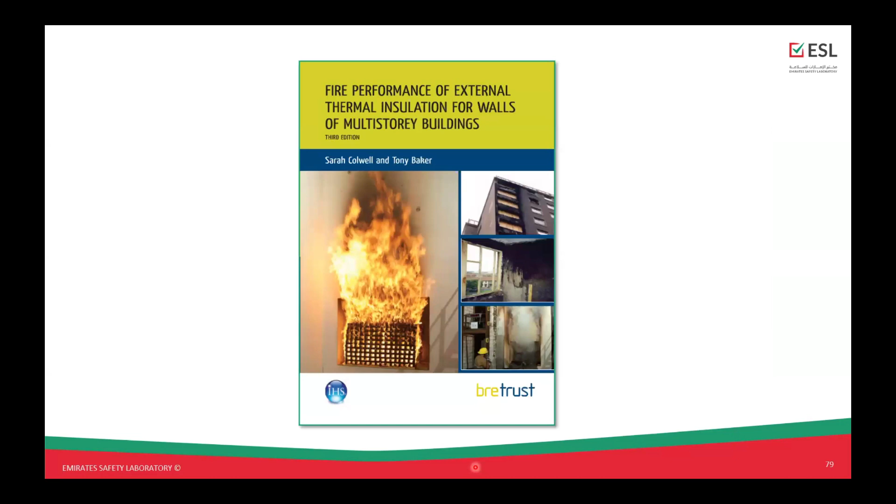Since there is no pass or fail criteria in BS 8414 Parts 1 and 2, a classification of fire performance was also required to interpret the test data. This classification system is formed in Annex A and B. In order for classification...

...to be undertaken, the system must have been tested to the full test duration requirements of BS 8414 Part 1 or 2, without any early termination of a full fire load exposure period.

Fire spread start time: the start time for fire spread is initiated when the temperature first recorded by any external thermocouples at level 1 equals or exceeds a 200 degrees Celsius rise above the start temperature for at least 30 seconds.

For external and internal fire spread, the temperature rise above the start temperature of any of the external or internal thermocouples at level 2 exceeds 600 degrees Celsius for a period of 30 seconds within 15 minutes of the start time. For mechanical performance, no failure criteria have been set.

So I'll give it to Mr. Julius again. Thank you, and thank you, Rachel, for the informative presentation. So I'll be...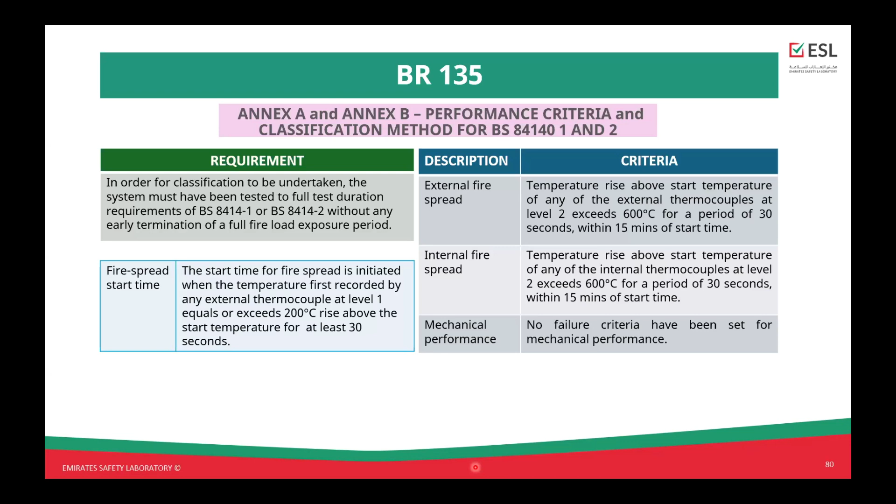Continuing, related to the benefits of product certification. I want to ask everyone: how do you find certification, or product certification, and its importance?

Basically, the importance of certification is that it provides confidence in the process as well as in the product, or manufacturing of the product, that is used in building or building materials, and the consistency of how these products are manufactured and maintained by the manufacturer through consistent audit by the certification body, and as well as it ensures impartiality during the certification process.

The certification process also involves the following steps, which I'm going to discuss in the next slide. And lastly, what are the benefits of product certification?

Basically, product certification gives assurance to the end user that the product delivered and installed meets certain requirements. It also ensures that there's a certification body that watches over certified product manufacturers and checks its consistency in producing the tested and certified products or systems. Traceability is maintained, ensuring a level playing field in terms of competition.

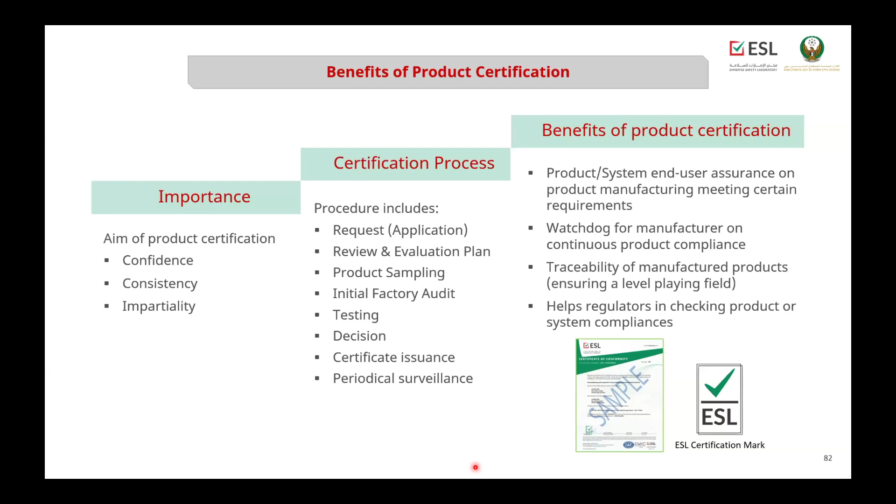So here I'm going to show you how product certification is done. First is the application, where a request is received from an applicant, either a manufacturer or an agent of the product. Then relevant submitted technical documents are reviewed and a plan of evaluation is made by the certification body and whoever is doing the product certification process.

Before the testing, there will be sampling of product samples, and this is how the certification body ensures that what will be tested is checked, and proper traceability is performed, so it can present the repeatability of the testing that will be conducted in the testing laboratory.

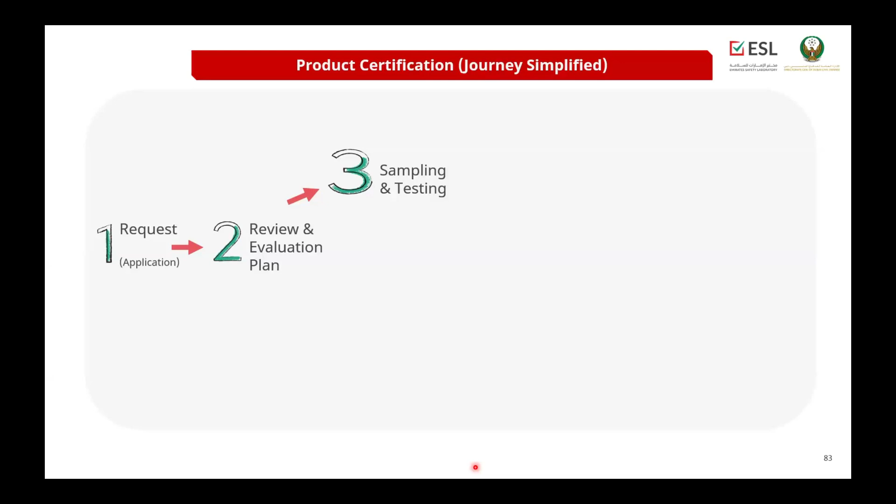We also have the initial factory audit, which is performed to assess the quality management system of the manufacturer diligently, including how the manufacturing processes are maintained, so that quality follows a certain international standard like ISO 9001.

After the testing and factory audit, a decision is made. If the testing is successful and there's a positive outcome in the audit, a certificate will be issued to the product manufacturer. This certificate is maintained periodically, evaluated through factory auditing and audit testing as a surveillance measure.

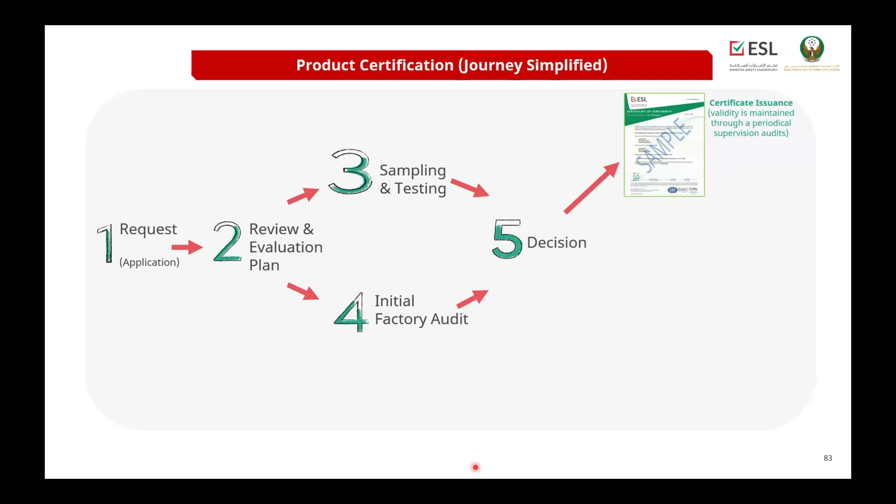In the UAE, tested and certified products or systems shall be registered and approved by civil defense, meaning every Emirate of the UAE requires that the products or systems used in their Emirate are registered with the local civil defense.

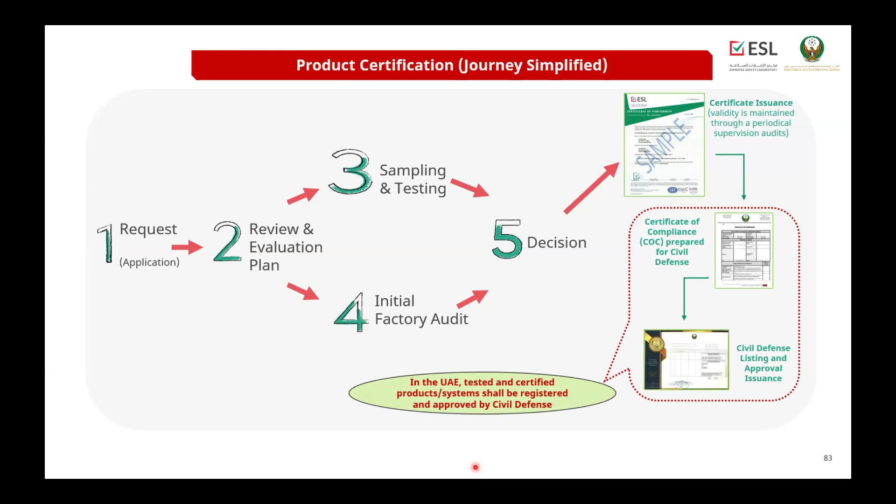And that brings us to our Q&A. We are happy to answer your questions that you can highlight to us, or maybe there are already questions listed.